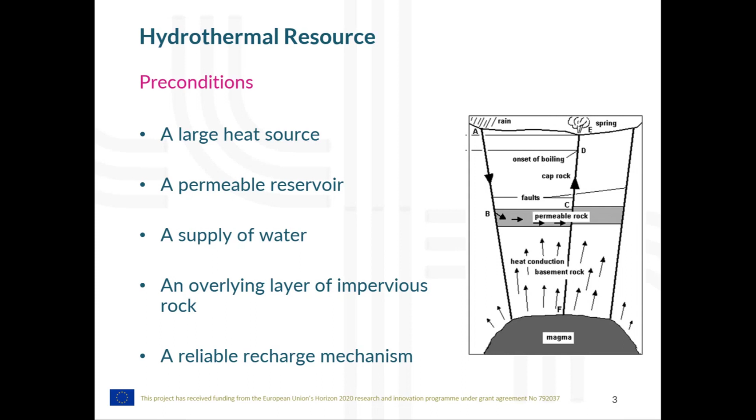Although it was said previously that EGS systems are applicable to almost every country in the world, certain site-specific preconditions have to be present for successful EGS project implementation. First of all, a large permeable reservoir containing large enough amount of heat resource is of course needed. Also, water as medium for heat transfer is necessary, same as overlaying layer of impervious rock. Also, there should exist injection and extraction wells that will form a reliable recharge mechanism.

EGS project, same as every other geothermal energy utilization project, is extremely interdisciplinary in its nature, especially in comparison to other types of power plants. So, expertise from geologists and mechanical engineers is prerequisite to find, locate, explore, and in some cases stimulate potential EGS sites or geological settings. It is also necessary to properly model geothermal heat reservoir, for which thermodynamic expertise is also

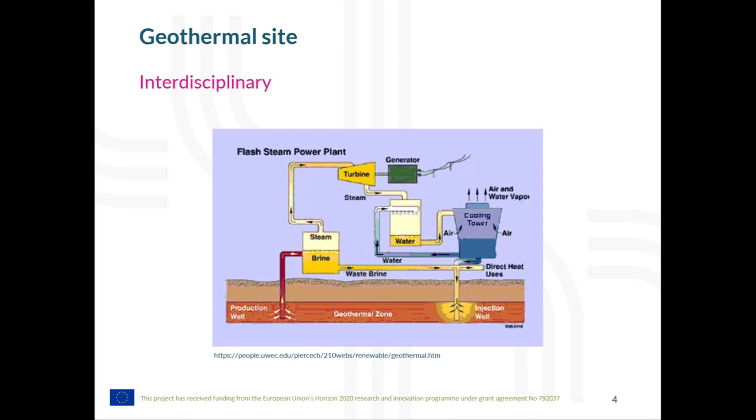needed. Once geothermal energy reaches surface, expertise from electrotechnical, mechanical, power system, and thermodynamic spheres is crucial to properly design and install surface facility for geothermal energy conversion to certain form of useful energy, such as electricity or heat or both.

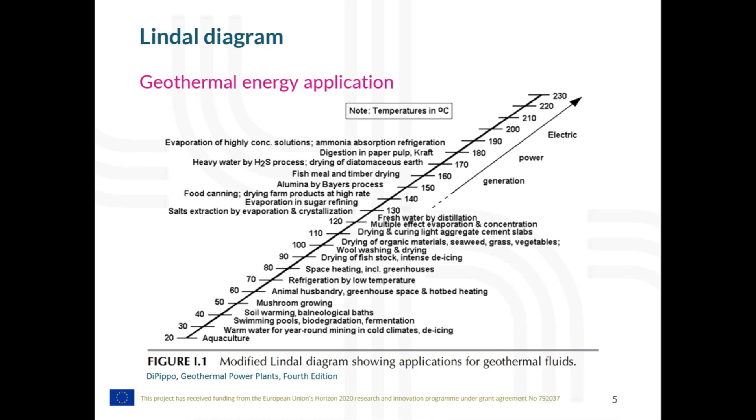And somewhere around 130 Celsius degrees starts the option for traditional geothermal electricity generation. The higher temperature of geothermal fluid is, the more electricity can be produced, and you can use a wider range of available techniques. But EGS aims to produce electricity with temperatures of geothermal brine well below already stated 130 Celsius degrees.

Once identified, a potential site for EGS project implementation doesn't mean it will be really implemented in practice. Namely, there are potentially numerous issues with EGS implementation on real site. First of all, brine can have too low temperature for energy needs in surrounding, and even if brine has high enough temperature, potential users such as power grid or heat demand pipelines and associated grid can be too far from

this site, and additionally, brine can be contaminated with some radionuclides, or its content can have significant potential for scaling and corrosion. Special attention should be also focused to nearby settlements and related social acceptance of these projects, especially regarding potential induced seismicity during process of drilling or fracturing.

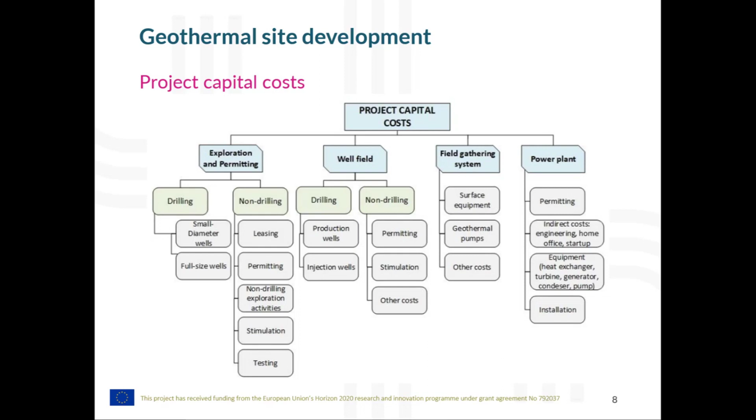A possible solution for the aforementioned issues is the proposed decision-making tool that was developed within work package 7 of this MEET project. It is capable of evaluating different geothermal energy transformation techniques, such as transformation to only heat, only electricity, or combined heat and electricity needs.

It is modeled in such a way that enables taking into account technical, economic, environmental, and societal aspects while deciding on EGS project implementation. Based on output results, one can get a clue on the best way to utilize available geothermal potential. It also integrates a multi-criteria decision-making, or in short MCDM, module, which enables grading of different application options. We will talk more about MCDM in the next slides.

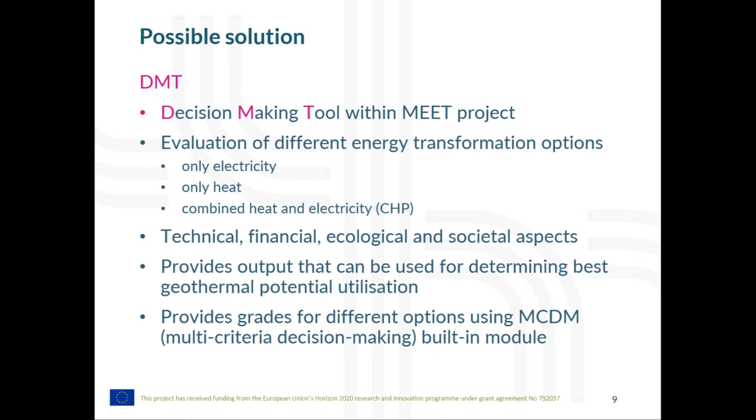The decision maker should gather all relevant data and input it into DMT through the modeled interface. This data, among others, relates to technology details, environmental aspects, certain kinds of forecasts, prices, demand, expected heat or electricity needs in the surroundings, and any other input.

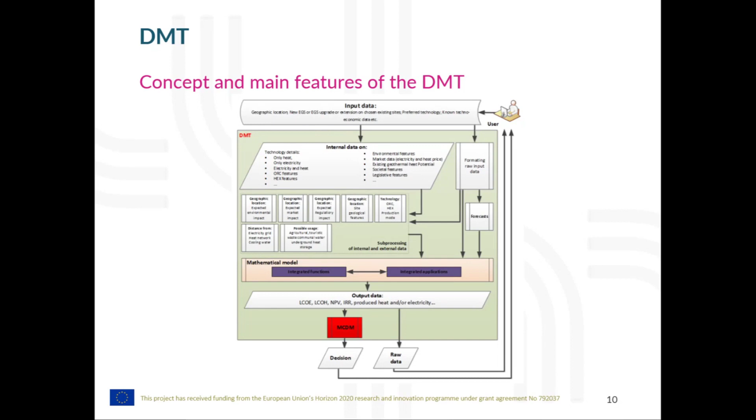In order to provide useful output data to the user, DMT has plenty of integrated functions that are also integrated into a user-friendly application. And as previously said, one of the major integrated modules is the MCDM module that helps users get a clue on the best option for utilization of available geothermal energy on site.

The previously described concept and approach in modeling and development of DMT has anticipated a satisfactory level of support needed for investors or other users that seek certain answers, mostly financial in nature, for a specific site and for different geothermal energy utilization on that site. Therefore, it integrates technical, economic, environmental, and societal aspects of geothermal projects, and as such can serve as a foundation for comprehensive assessment of an EGS project.

The main outputs that can be of interest for users are internal rate of return, levelized cost of energy, either electricity or heat or both, and net present value of the project. Of course, there are a large number of input parameters within DMT, and for those that can be directly or exactly monetized, the user has two options: either to use default values in the application, or to use their specified values.

There is also a large number of input parameters that are very hard or even impossible to monetize, such as social acceptance, environmental aspects, and others. These parameters are accounted for and processed by the already mentioned MCDM module of DMT, which enables comparison between several approaches and/or different sites. Within this model, the user can specify their subjective attitudes towards specific parameters or groups of parameters by inputting different weights to some of them.

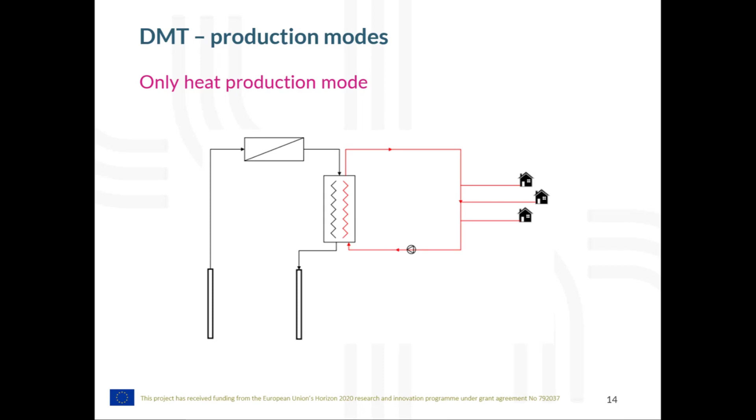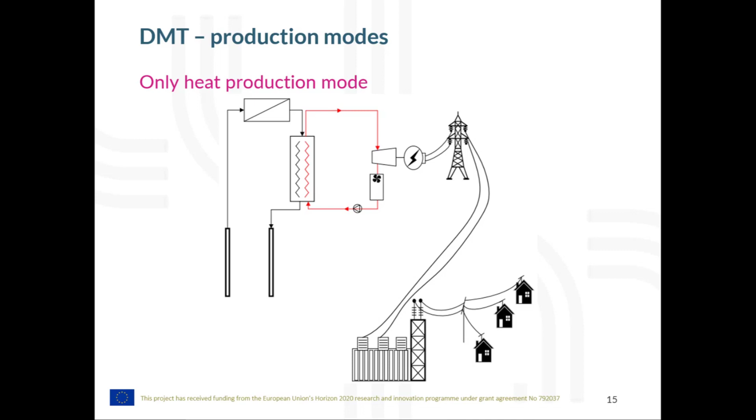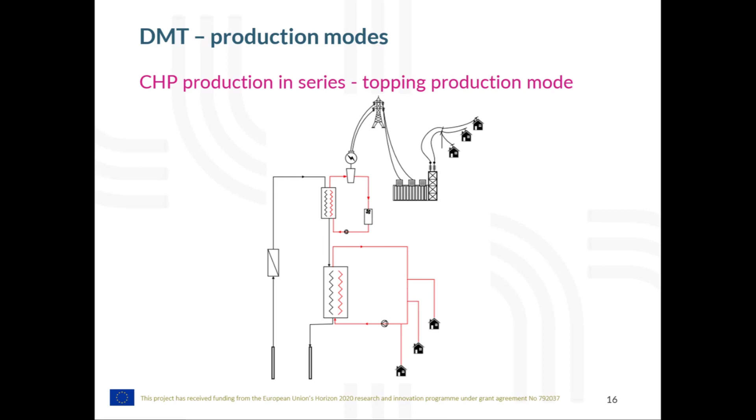The third mode is depicted on this slide and relates to the first kind of combined heat and electricity production, the so-called topping mode. There is also a bottoming mode, but it is not modeled because it is rarely used. Part of the geothermal energy potential in this mode is transformed into electricity, and the rest of the available energy is transformed to usually low temperature heat demand. So this is combined heat and electricity in series.

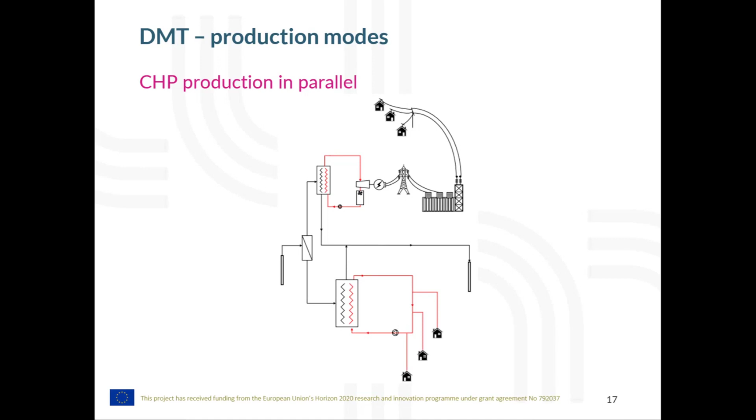Apart from this, we also have a fourth mode, where we have combined heat and electricity production in parallel. Here, the total geothermal energy potential is partly transformed into electricity, and the rest of the available geothermal energy is transformed to usually medium to high temperature heat demand.

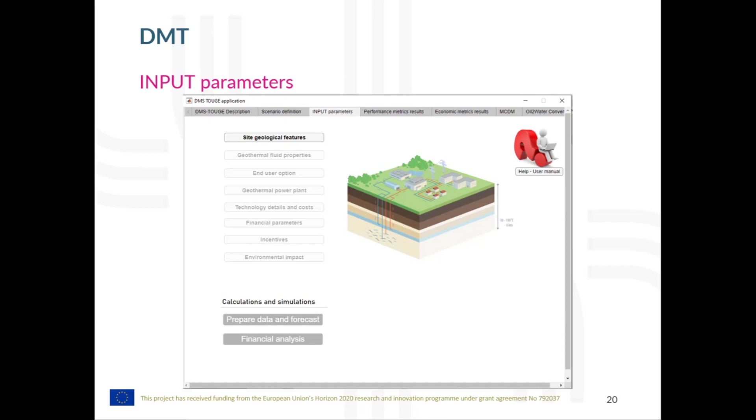In general, energy-related projects, and more specifically EGS projects, involve numerous issues and uncertainties during the phase of planning and their commission. For example, it is hard to accomplish a balanced techno-socio-economic evaluation due to many conflicting criteria and their interaction. Therefore, in practice, rational decision-making in energy projects is usually very difficult and complex. In this context, multi-criteria decision analysis, or MCDA, can be of great importance. It represents an operational evaluation and decision support approach suitable for addressing complex problems featured with high uncertainty, conflicting objectives, different forms of data and information, and many different interests from the perspective of users.

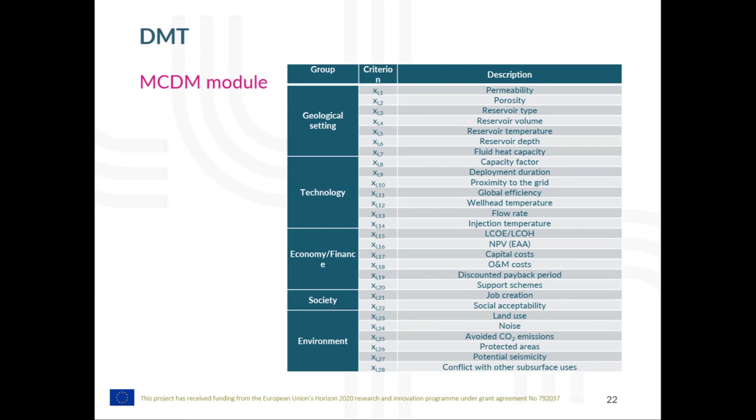Due to the fact that not every investor or user has the same objective attitudes, the analytic hierarchy process, or AHP approach, is also of great interest in this project. In this approach, AHP provides objective mathematics to process these inevitable subjective perspectives and preferences. It is a synthesizing criteria method that calculates a ratio-scaled importance of alternatives through pairwise comparison of criteria, subcriteria, and alternatives.

Once defined, these judgment matrices, or pairwise comparison matrices better said, are used to calculate the local priorities that express the relative impact of the set of criteria on a criterion in that level.

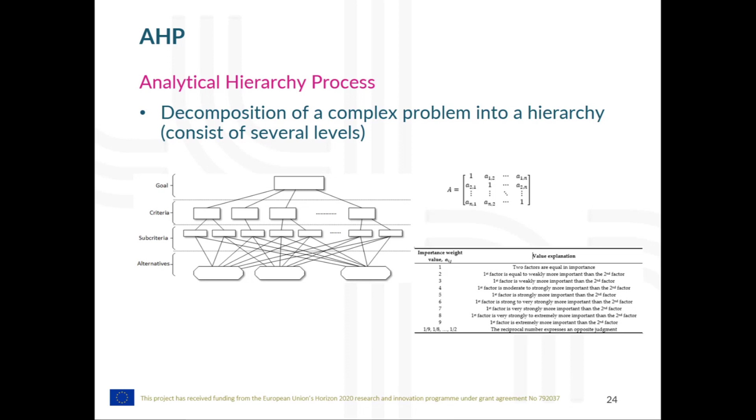For the purpose of enhancing quality and confidence of DMT results, a special AHP-based case study was conducted. The previously mentioned 28 criteria from the MCDM module and 3 different alternatives of using geothermal energy, so only heat, only electricity, or both in combined mode, were integrated into an Excel document for the AHP survey.

This document was delivered to examinees from different areas or points of view, and those are industry, educational institutions, research and technology organizations, small and medium-sized enterprises, local community, and the rest. There are some other groups that are put together as other, and we got 37 responses.

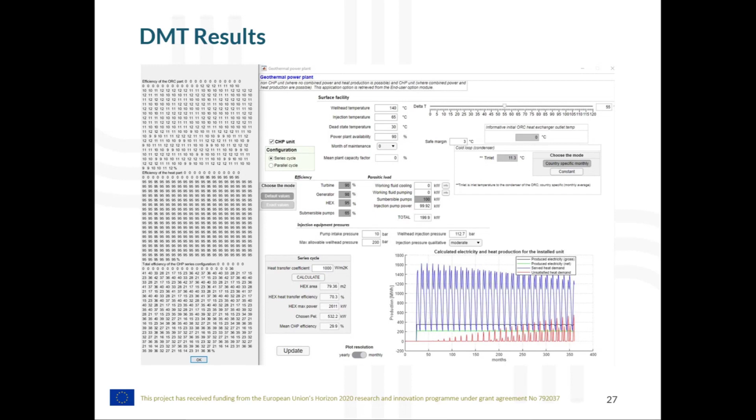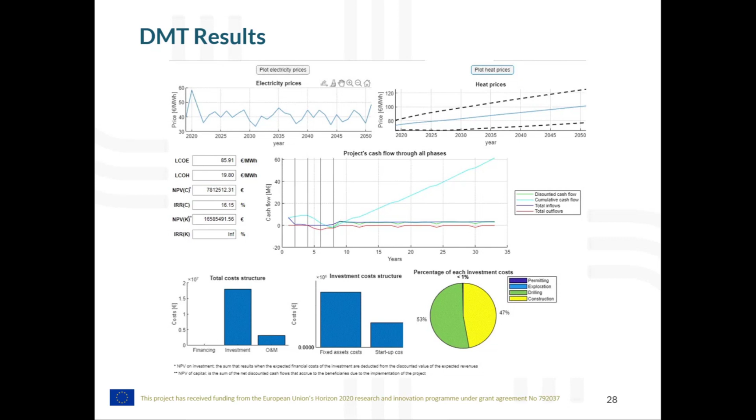As already mentioned at the beginning, besides our activity in scope of Work Package 7, we were also involved in activities and deliverables in scope of Work Package 4, where our task was to evaluate techno-economic feasibility of transforming existing oil fields that are at the end or near the end of their lifetime into geothermal assets, in short, oil to water. Eric talked more about this.

In this context, several different options or alternatives of available geothermal energy conversion were compared. Additionally, petroleum assets that were converted to geothermal assets were also compared. Major benefits of this approach that Eric also mentioned are use of already developed hydrocarbon reservoirs with high temperature and water cut, avoiding the capital cost by using existing infrastructure, and avoiding the cost of decommissioning of oil or gas wells.

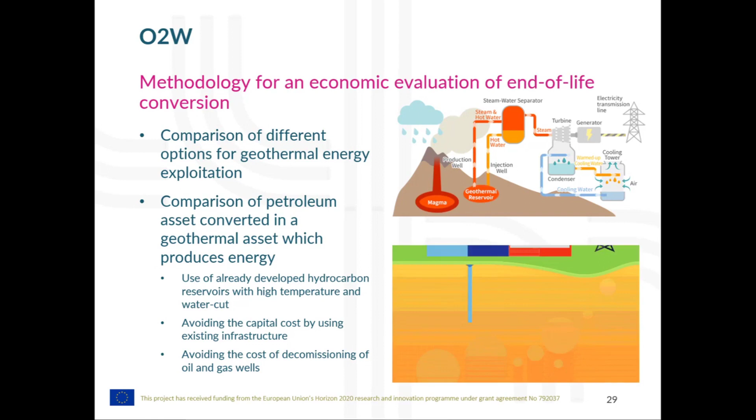For this purpose, an additional module in DMT was also developed together with associated methodology and scenario analysis executed in MS Excel. Again, a huge number of new input parameters were identified as necessary for this oil to water conversion. Some of them are properties of geothermal fluid or reservoir, geographical location of the examined wells, as well as availability of demand for heat or electricity in nearby surroundings. Costs related to investment or capex and operation or opex are also taken into account.

For this purpose also, emission factors for each EU country were obtained, and in this way avoided CO2 emissions. It is possible to calculate these avoided CO2 emissions based on the share of each fossil fuel in total fossil fuel generation for each EU country.

And main results of the oil to water conversion methodology were production quantities of both heat and electricity, economic parameters such as levelized cost of electricity and levelized cost of heat, net present value, and associated cash flow. As already mentioned, based on the obtained emission factor, it was also possible to evaluate carbon intensity decline in different oil to water scenarios.